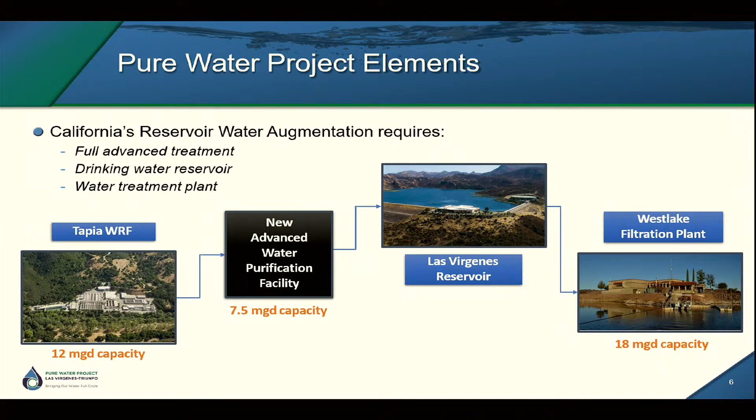So this is the third project of this sort, the third surface water augmentation project for California behind San Diego and East County. It utilizes a lot of our existing infrastructure, such as Las Virgenes Reservoir and the Westlake filtration plant. We can go to the next one.

This is a picture of our site at 30800 Agoura Road. The site we've designed the facility in such a way to reserve a portion on the western side as a buffer for the apartments next door, as well as hopefully to develop a public benefit area in the future. It'll also be an area we'll be doing some of that oak tree mitigation that I was speaking of.

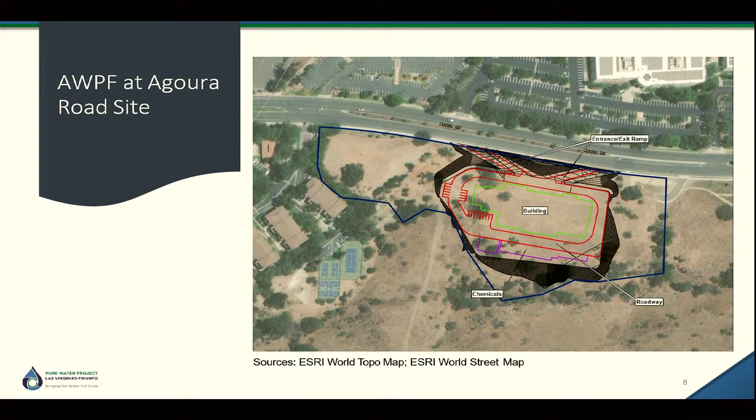So this is just a general layout of the facility a little bit earlier on in our planning stages, but where it's situated in the context of the parcel still remains the same. We can go to the next one.

We're right now finishing up, we just finished up the 60% design. I think we've been very successful integrating these policy principles into our design. And then we can go to the next one.

I wanted to share with you kind of some of our most recent architectural renderings. This one is actually a bit of an older one and is more conceptual, but I wanted to give you a bird's eye view of the facility. So Agoura Road would be at the bottom of that picture there. That is the advanced water purification facility.

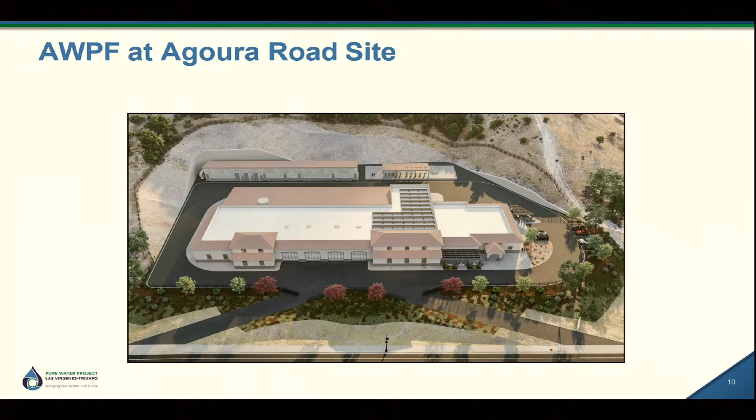We do have some accommodations for possibly utilizing solar on the roof. We've tried to keep any more industrial looking elements like the chemical storage at the back of the building so there's very little visibility from the street. And we've gone through a pretty extensive architectural review process with both Jacobs Engineering, our owner's advisor, and Walsh Construction, who's our progressive design builder.

On the next slide, you can see some of the renderings that we've been working with recently. This is a view of the entry into the facility from Agoura Road. We've tried to break up the blocking of the building, incorporate differing materials, overhangs, really try and make it as aesthetically pleasing as possible.

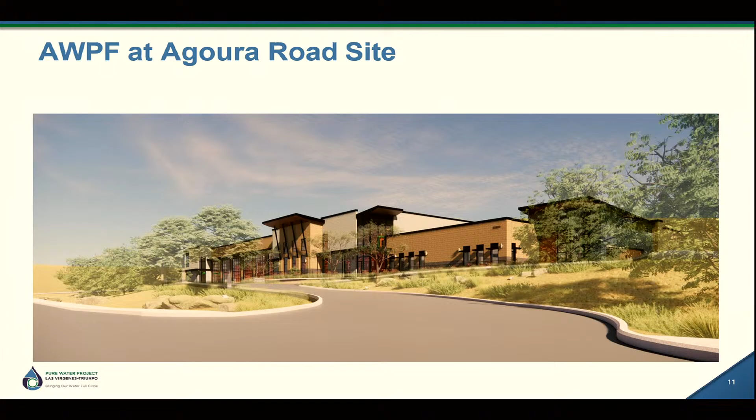We actually went through a process as we were developing this architecture where some of our board members and some of our staff went along Agoura Road, took pictures of some of the more architecturally significant buildings in there, and used that to help guide our architectural design of this building. We can go to the next one.

So this is from the other angle, traveling west, a look at the east side of the building. I will note just a few things about these renderings. The box you see to the left, the white box, that just hasn't been fully designed out yet, but we don't expect it to just remain a white box. There will be fencing and landscaping around that, and we'll also be applying some other materials, but that would be the transformer for the building.

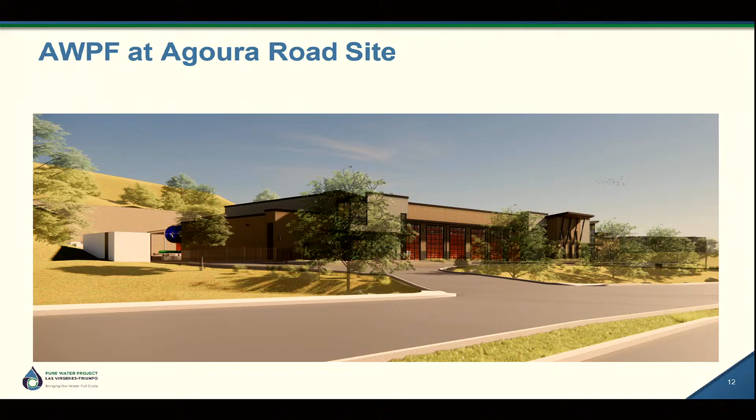And then if we go to the next slide, you'll see it a little better, but through those large windows in front, that's our process area where the reverse osmosis, the microfiltration will be.

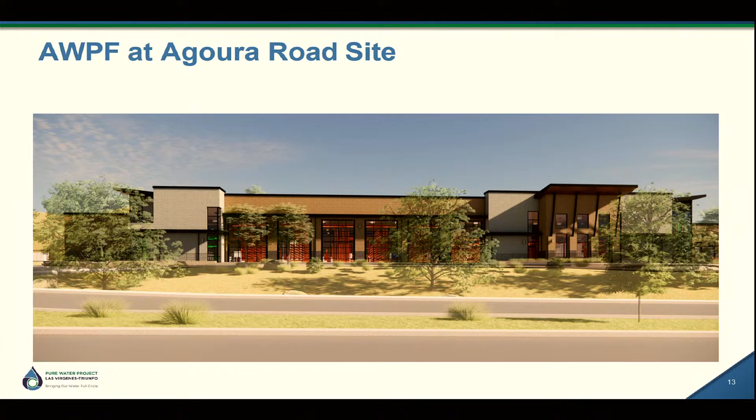It's shown in red here just to give a little contrast in the picture, but it will not be red. Eventually, we'll be choosing coatings and colorings appropriate for the facility. You typically see those blue, but again, we wanted it to pop a little more in the picture. Those are all items we'll be working out between 60 and 100% design.

We've been working with staff to mitigate those impacts. We also have a shared alignment for a lot of these pipes, so we're not digging up multiple trenches. We're able to utilize that shared alignment.

What we're looking at now is the guaranteed maximum price for the concentrate pipeline and the advanced water purification facility. The other three pipelines, the source water, purified water, and residuals line, are on a bit of a later construction timeline because they're much shorter, but everything is wrapping up at the same time.

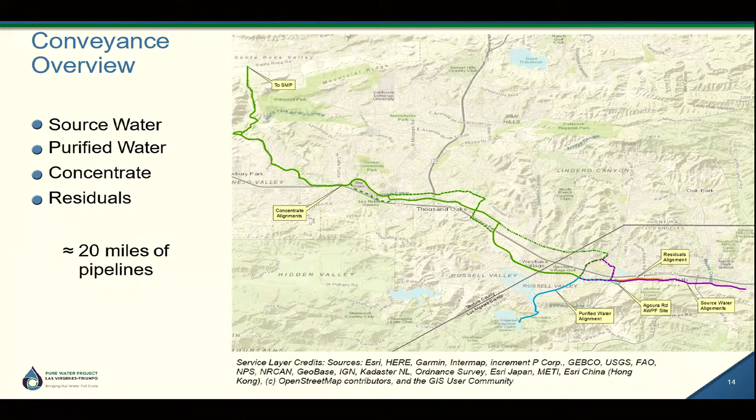I wanted to quickly talk about the schedule. As I mentioned, over the last 2 years with Walsh Construction, Carollo Engineers, and Brown and Caldwell Engineers, we've been going through phase 1 of our progressive design build, which gets us from 0 to 60% design.

Right now we're negotiating a guaranteed maximum price for phase 2, which will bring the design to 100% and then build the facility. We foresee groundbreaking to be April of next year for the advanced water purification facility, so it's coming up pretty close. The pipelines would be on a similar schedule. We're looking at about 2 years of full construction.

The overall project is not set to complete until 2030, but there's a lot of time on the back end for testing, certification, and permitting. We are looking at breaking ground next year and then construction continuing through 2028.

One of our first activities before we properly break ground in April is implementation of our oak tree and rare plant mitigation plan. We've been working with California Department of Fish and Wildlife as well as city staff. There are oak trees on the site that unfortunately do need to be removed.

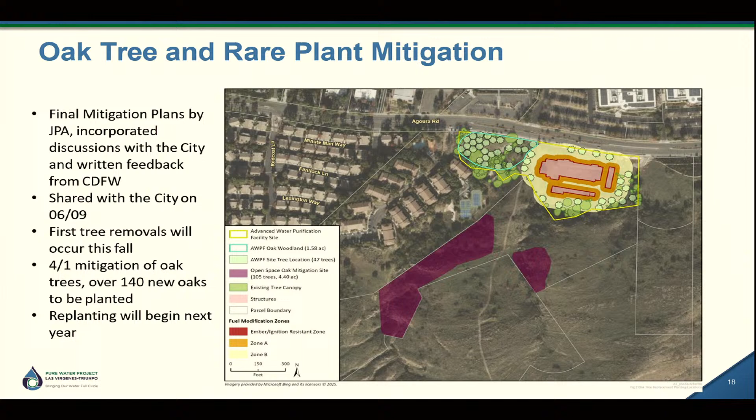The city staff has been really great working with us as far as finding an appropriate size tree for different areas, especially areas on the city's parcel which can be quite steep and have shallow soil, so smaller trees have a better chance of survivability up there. We've put together a plan that we feel is environmentally appropriate based on the conditions of the site. With that, I'm happy to take any questions from council. We're really excited about this project, and we're looking forward to building a beautiful building and a lot of oak trees that the community will enjoy.

Thank you so much for that presentation. Do we have any questions? Yes, thank you so much. I really appreciate all of the thoughtfulness going into this. It's such an important facility, and we're really honored it's going to be in our fair city. Glad to hear our staff is being a wonderful partner, although it's no surprise—they are wonderful—but happy to hear you're in such close contact.

Just a quick question—you mentioned possible solar on the facility. Is there a reason you wouldn't put solar, or would you put any kind of backup battery? It's obviously in a very high fire hazard severity zone, so it probably would be subject to the power shutoffs we have, and I'd imagine that would be a big problem if power were to be shut off. So what kind of backup facilities or processes are you going to have for that kind of facility?

Yeah, we do have some backup power generation on site. It'll basically give us the ability to keep the processes running so we can do an appropriate shutdown and things just aren't stopped in the middle of a PSPS. It is limited, because of the energy needs of the facility, we don't have full power backup—it would have required quite a large generator. But we've tried to make it as efficient as possible to keep key processes powered, as well as things like AC for the server room and sensitive areas of the plant.

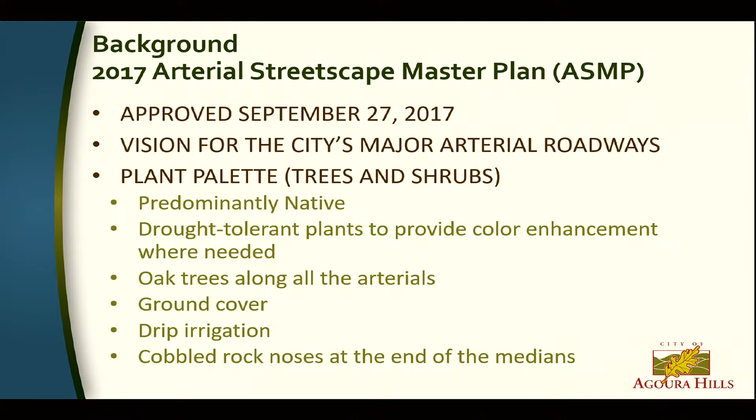The selection of street trees was further determined with the following criteria in mind: consideration of the tree's propensity to lift surrounding infrastructure over time, consideration of the tree's maintenance demand, preference of native over non-native, consideration of the tree's aesthetic value, and consideration of the tree's consistency with the surrounding areas.

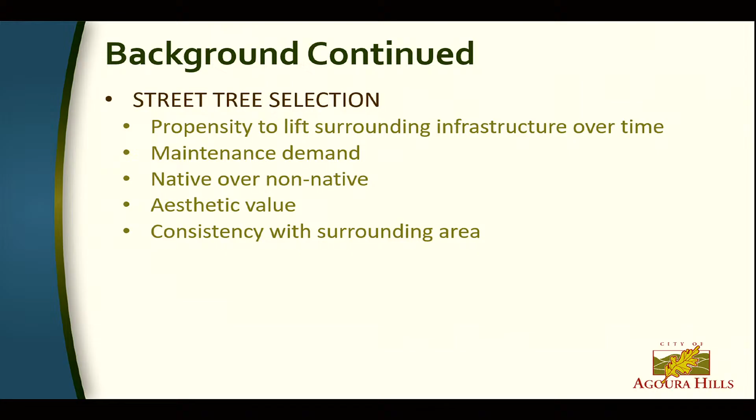Since 2017, the Arterial Streetscape Master Plan has been utilized as a guideline document for renovation of the city's landscape medians. As some of the selected native plants failed to thrive, other plants were added, such as lantana, which is a low-maintenance plant, in areas of both Agoura Road and Kanan Road medians to accent the existing native plantings.

Lessons have been learned along the way. While the city continued to replace plants in the medians consistent with the Arterial Streetscape Master Plan, staff observed that some of the native plants perpetually failed to thrive, not being compatible with the existing roadway conditions, while other plants were not conducive to typical landscape maintenance practice.

Just recently, the City Council included the enhancement of median landscaping on Kanan Road between Thousand Oaks Boulevard and North City limits. The implementation of this goal was included as part of the city's operation and maintenance budget for landscaping over the next 3 years.

To accomplish this goal, the first step is to complete the update of the Arterial Streetscape Master Plan, which involved revising and amending the landscape plant palette to allow more planting options based on our experience and observations from the Agoura Road and Kanan Road medians, while maintaining the original objective of the Arterial Streetscape Master Plan, which was to provide a plant palette that is predominantly native.

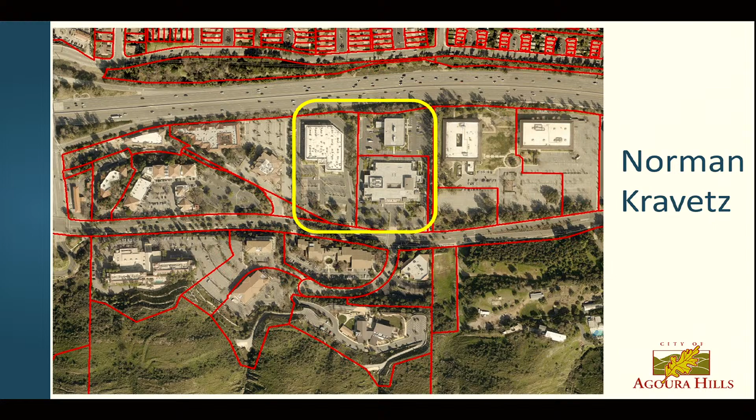And of course, along the way, we'd have touch points where we bring things back and update the committee and the council on that. But as far as Mr. Kravetz's property goes, that's really the discussions we've had in the three times we've met. It's moving in a direction where it's going to be collaborative and a partnership, so we're excited about that. There's definitely some hurdles we'll have to work through together, and we'll be bringing updates to you as we go through those things.

So now we're going to move on to the Hankey Investment Company. These are the two buildings that you see now in the rectangle. Again, one of these buildings is 100,000 square feet, completely vacant, and the other one is 50% vacant. This is where the Biocom discussion kind of takes place.

And I'll put this out there for the record first - I have to say this caveat that we have not yet confirmed that this is something they are open to, but we have a discussion with them later this month, and we plan on bringing this up. And why does Biocom come into play here?

It's because when we looked at Mr. Kravetz's site, and talked about housing and potential commercial uses, and potentially a life science campus, or UCLA health campus, or a use like that, you talk to that space and realize that what their folks are looking for around their workplace is that their families want housing and they want experiences - they want places to go.

And so while we're talking about Mr. Kravetz's property, and it just happens that we're looking at potentially zones that have housing and commercial, that might be a perfect alignment with what the council has talked about before - creating a space where we could have life sciences come into the mix. So the ED team has had an initial discussion with Biocom, and for those unfamiliar with Biocom, they're a company that represents over 1,700 members in the life science space. They really spoke to us about what it takes to be a life science friendly city.

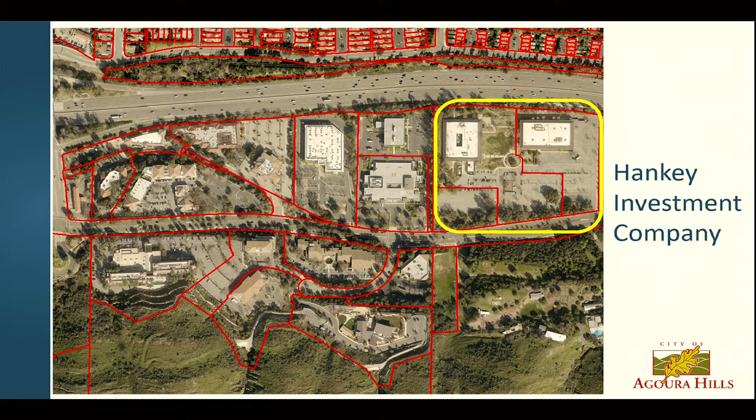Because it's one thing, in their words, for a city to say they want to be life science friendly, but if you truly want to be, there are checklists and items to consider. So that would be up to us to bring to the council to give you options and choices about where we might need to address regulatory things. We're not there yet, but we put that out there because this could potentially be a location where, if all goes well in our conversations later this month, we'll hopefully be coming back to you talking about potential life science or biotech space.

Okay, so here's what we're going to do: we're going to look at the same map, but now try to break it up into segments at this macro level, 50,000 foot view, of what everything could potentially be together.

In this rectangle, you see the area where, if Mr. Kravetz's property is able to do what he'd like, you'll have some commercial use within this rectangle. You have the old Rams building, currently occupied by 2 tenants, with a willing partner in the property owner inquiring about restaurants, breweries, and gathering spaces in that building. And as mentioned earlier, on the PennyMac site they're looking at potentially having commercial uses on the front side of that property too. So what you first start with is a rectangle that you can envision being commercial space.

Then you have the next rectangle, the V2 building. That's potentially where there have been discussions floated around maybe a boutique hotel. That wasn't just a vision we brought up at the table — it was actually initiated by Mr. Kravetz's team. So you could potentially see something there, but there's a lot to be discussed on that property since it's still got a 3-year lease on it. But now you've got commercial and potential hotel.

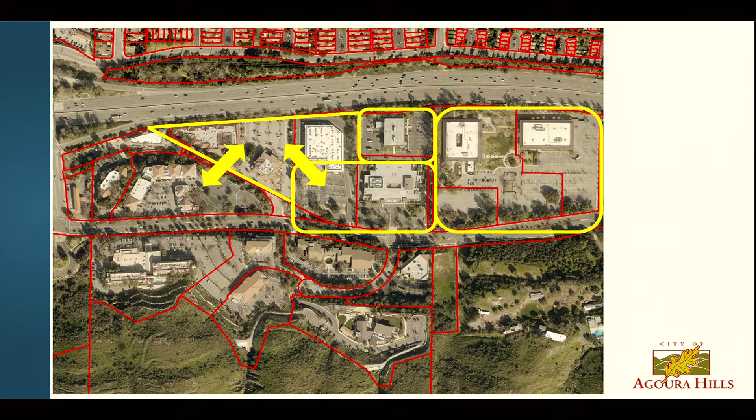So on September 29th, we actually took this item to the LUEDC, Mayor Sylvester and Councilmember Klein-Lopez. I won't speak for them, they can speak for themselves, but I think it's safe to say that they were encouraged by the progress to date, so I'm sure they'll touch on that when the time comes.

So next steps. If the council goes forward with the recommendation to approve the contract with RRM, we can begin the scope of work immediately with them.

We'll continue to engage with willing partners, and I put an 's' at the end of that because obviously we have a willing partner in Mr. Kravitz, but the idea would be hopefully maybe the Hankey Investment Company gets on board and we start to see more partners that are willing to have discussions, but we'll continue to actively engage to seek them out.

We also plan on implementing a public outreach strategy and then having touch points with the LUEDC and the various governing boards, of course the Planning Commission and the City Council.

From a fiscal standpoint, the fiscal year 2025-26 budget does include that $50,000 that I mentioned, so there are no additional impacts to the current fiscal year to cover the work of the concept plan.

And I just wanted to make a note that this does align nicely when we have our mid-cycle discussion for the FY 26-27, because the concept work is looking like it has a completion date of spring of 2026, which will put us right in time to be discussing those next steps and then deciding upon what that financially will mean going into '26 and '27.